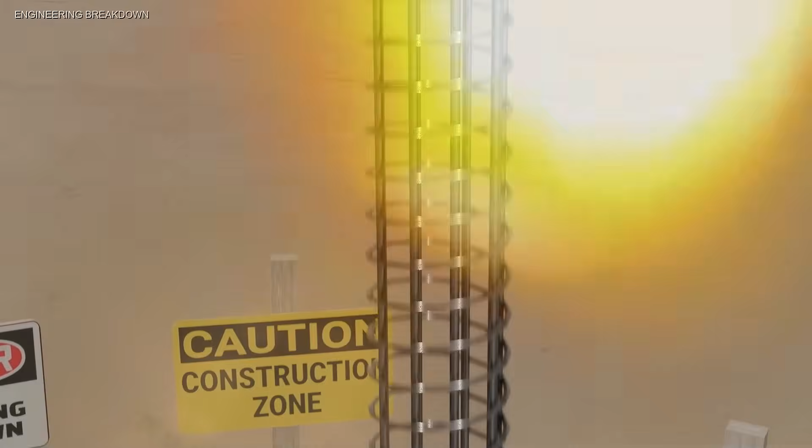Concrete is everywhere, under your feet, inside your walls, holding up bridges, carrying highways, supporting skyscrapers that weigh hundreds of thousands of tons, and almost all of it depends on one gray powder: cement. Take the cement out, and ordinary concrete stops being concrete in the way the modern construction industry understands it. The rocks do not lock together. The sand does not become a solid mass. The structure does not gain the strength engineers expect.

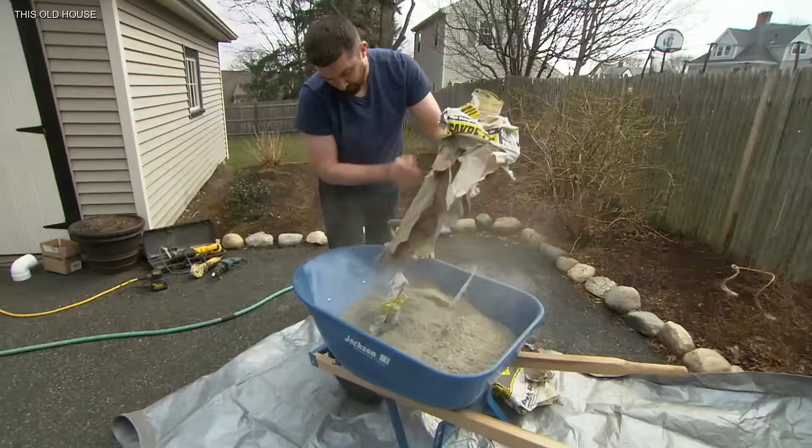So for nearly 200 years, the basic formula has barely changed: stone, sand, water, Portland cement. Then an American company did something that sounds wrong the first time you hear it. It made concrete without Portland cement. Not a laboratory puck. Not a decorative brick. Pourable, pumpable ready-mix concrete. The kind that can arrive in a normal mixer truck. The kind workers can place using equipment they already know.

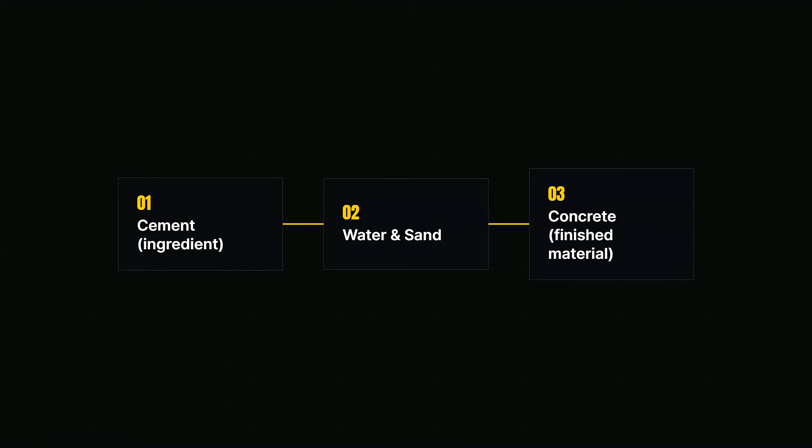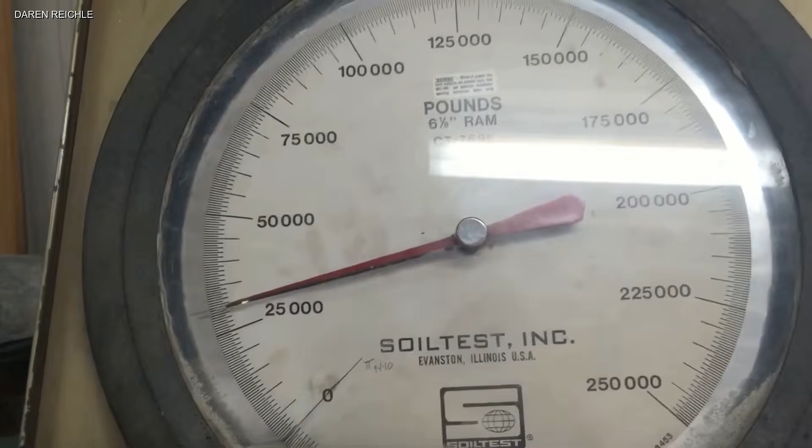The kind that has now been poured into building foundations, shear walls, slabs, columns, sidewalks, airport projects, a section of Interstate 94 in Minnesota, and even the new J.P. Morgan Chase headquarters in Manhattan. The company is called C-Crete Technologies, and according to its latest technical data, its cement-free mixes can reach more than 7,000 pounds per square inch of compressive strength at 28 days. Change the mix design and C-Crete says they can exceed 10,000 psi.

That is not the strange part. The strange part is what is missing: no Portland cement. And if this technology can scale from thousands of tons of real-world pours into millions of tons, then one of the oldest industrial recipes on Earth suddenly has competition.

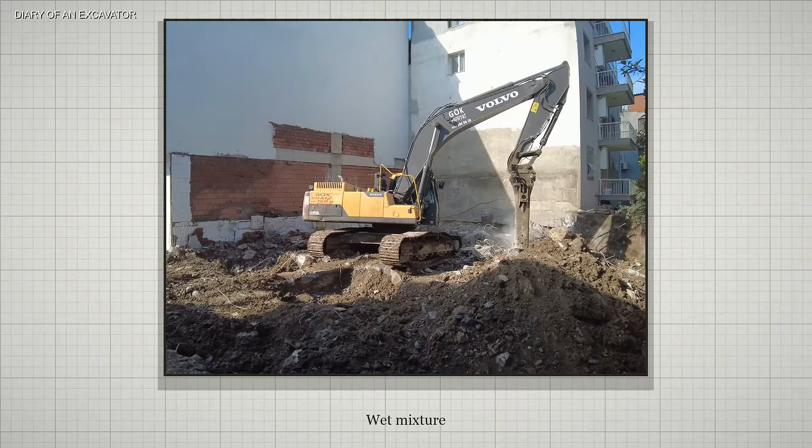A normal concrete mix contains coarse aggregate, usually stone or gravel, fine aggregate, usually sand, water, and a binder. In conventional concrete, that binder is Portland cement. Add water and the cement begins a series of chemical reactions called hydration. New mineral structures form. They grow around the sand and stone. They interlock. The wet mixture slowly hardens into the artificial rock we call concrete. That chemistry is why concrete can start as something soft enough to pump through a hose and end as something strong enough to support a bridge.

Portland cement is astonishingly good at that job. Cheap, predictable, available almost everywhere, supported by more than a century of standards, engineering knowledge, equipment, and supply chains. And the scale is difficult to picture. A modern cement plant does not look like a chemistry experiment. It looks like a small industrial city. Quarries feed crushers. Conveyors move mountains of mineral. Raw material is ground into powder.

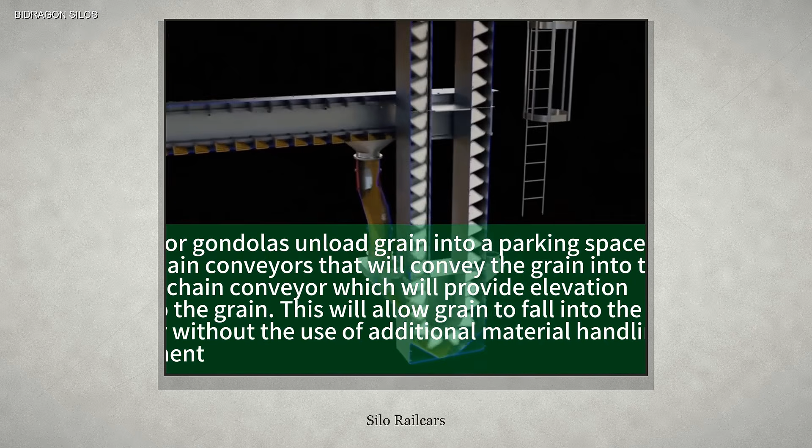Kilns stretch for hundreds of feet. Clinker comes out as glowing nodules. Giant mills grind it again. Silos hold the finished cement. Railcars and tanker trucks carry it toward ready-mix plants. Then the cement disappears into concrete that may be poured only hours later. That entire chain is optimized around one recipe.

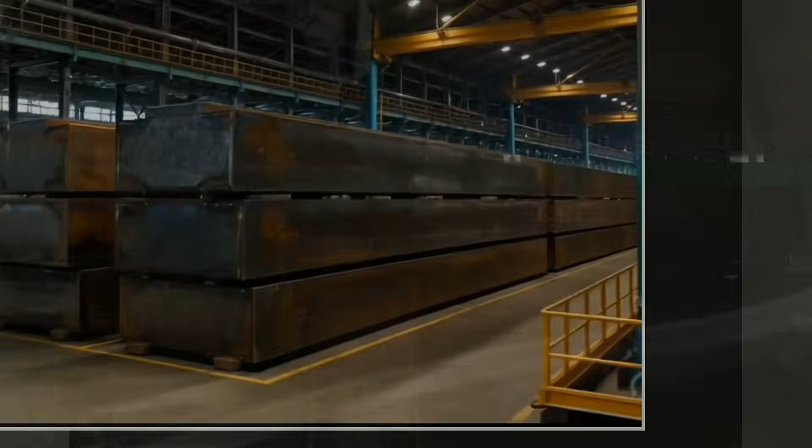If you invent a replacement that needs completely different trucks, different storage, different mixing, different curing, and different crews, you are not replacing one ingredient. You are asking an industry worth hundreds of billions of dollars to rebuild itself around you. That is why the word drop-in is so important in this story. The closer C-Crete can make the new binder behave like the old one inside existing infrastructure, the less of the industry it has to defeat at once.

Do not replace the concrete truck. Do not replace the pump. Do not replace the finisher. Replace the chemistry hiding inside the gray powder. That is also why replacing it is so difficult. You are not competing with a bad product. You are competing with one of the most successful materials ever invented.

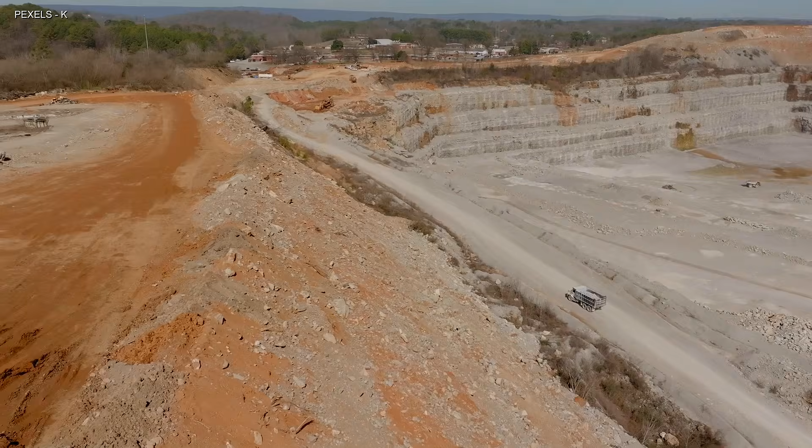But Portland cement has a problem hidden inside the way it is made. The conventional process begins largely with limestone. Limestone contains calcium carbonate.

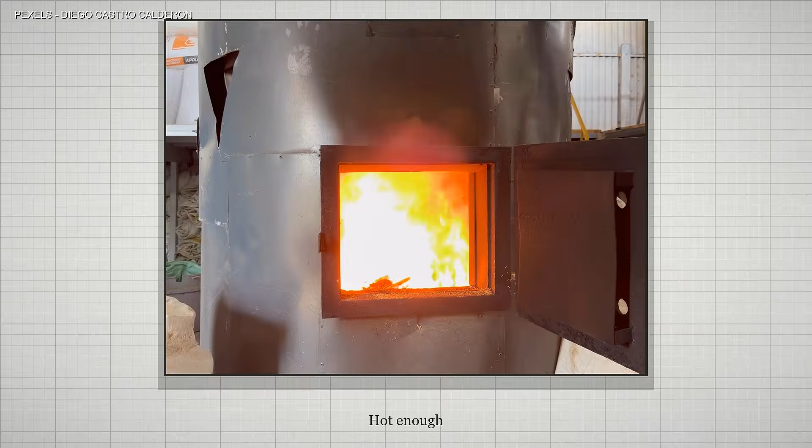To turn it into the reactive material needed for cement, producers crush the rock, blend it with other minerals, and heat the mixture inside enormous rotating kilns. The temperature can reach around 1450 degrees Celsius, hot enough that the inside of the kiln becomes a glowing industrial furnace. That heat requires huge amounts of energy.

But even if you powered the entire kiln with clean electricity, another problem would remain. The limestone itself releases carbon dioxide when it is chemically transformed. Calcium carbonate becomes calcium oxide. CO2 leaves the rock. That is process chemistry, not simply dirty fuel. And that is why cement is so hard to decarbonize.

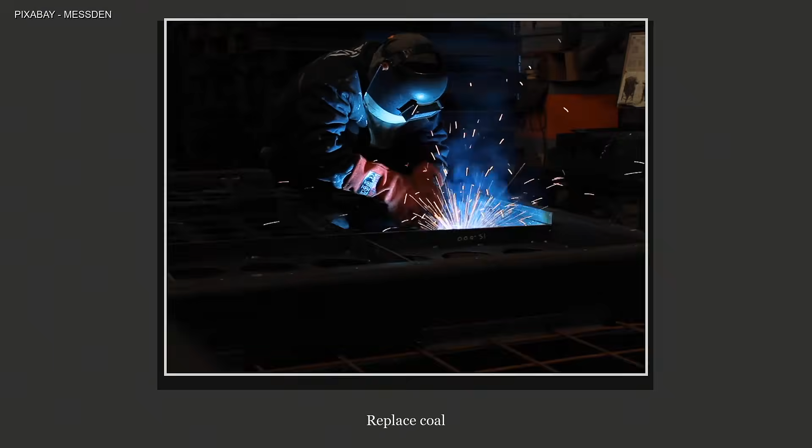You can replace coal, you can improve efficiency, you can capture some emissions, but the conventional recipe starts with a mineral that physically contains carbon dioxide and then deliberately bakes that carbon dioxide out. Cement production is responsible for roughly 7 to 8% of global carbon dioxide emissions by commonly cited industry estimates. That is an extraordinary number for a material most people never think about.

And the reason is simple. We use an unbelievable amount of it. Concrete is often described as the most consumed material on Earth after water. Roads, homes, ports, dams, hospitals, factories, data centers, wind turbine foundations, runways. Almost every part of the built world eventually asks for concrete.

So the challenge is not to invent a green material that works in one beautiful demonstration building. The challenge is to create something the construction industry can actually use, at enormous scale, at ordinary job sites, under ordinary deadlines, with ordinary workers. And this is where C-Crete's approach becomes interesting.

The company's product is described as cement-free concrete, but that phrase needs one important clarification. C-Crete has not discovered a way to make stone and sand stick together with nothing. There is still a binder. What disappears is Portland cement. The company has developed alternative cementitious binders made from abundant natural rocks and industrial byproducts.

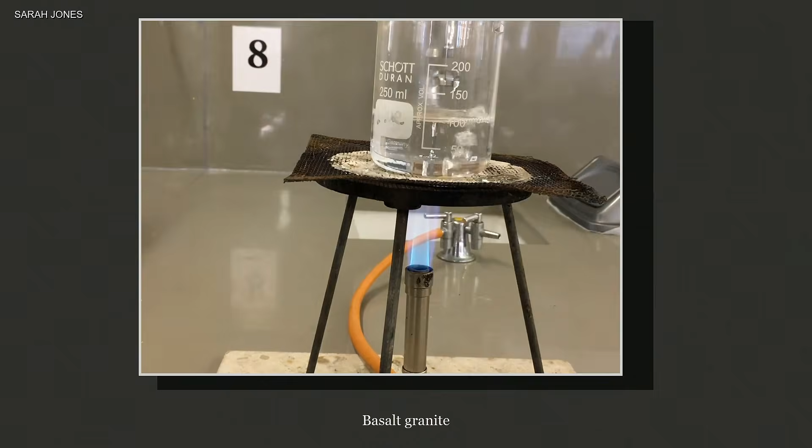The exact formulation is proprietary. But C-Crete has publicly demonstrated versions based on materials including zeolite, basalt, and granite. That distinction matters. This is not concrete without chemistry. It is concrete with different chemistry. And the strategy is surprisingly simple.

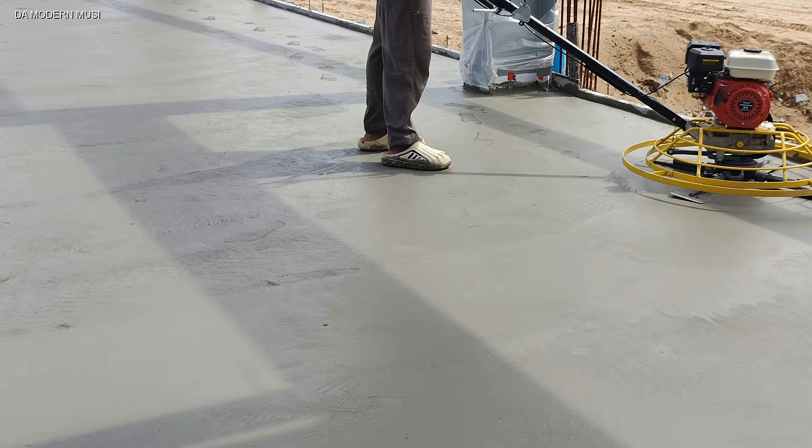Do not ask every construction company in America to replace its trucks. Do not invent a new pump. Do not require workers to learn an entirely new pouring technique. Change the powder inside the mix. Keep as much of the rest of the construction system as possible. That is what people mean when they call a technology drop-in. The new material has a much better chance if it can disappear into the old infrastructure. And C-Crete has spent the last few years trying to prove exactly that.

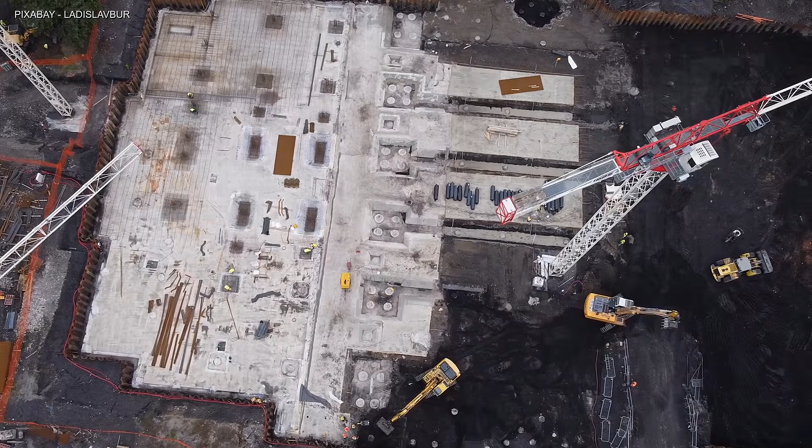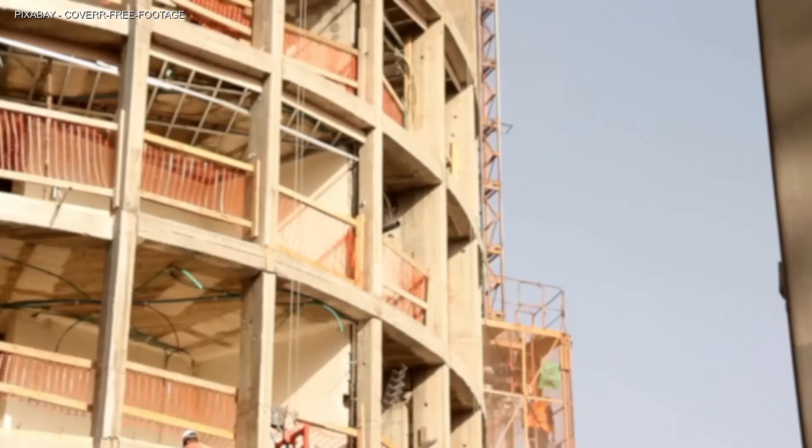The first major public demonstration came in Seattle in 2023. A commercial building in the Green Lake neighborhood needed a seismic retrofit. A normal project. A real building. Real structural work. C-Crete supplied cement-free concrete that was delivered through a local ready-mix company. Workers poured it into foundations and shear walls. About 60 tons in the first publicly announced pour.

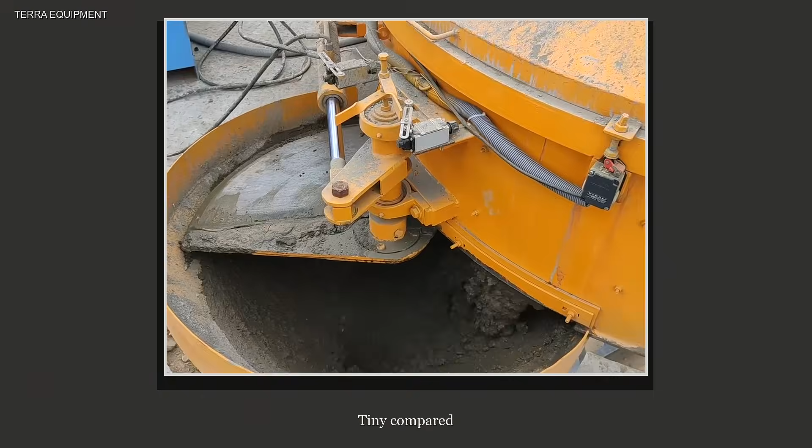Then the experiment expanded. More C-Crete mixes were used at the same site. Different feedstocks. Different formulations. By the time the company demonstrated a basalt-based version in 2024, the total cement-free concrete placed at the Seattle project had reached roughly 140 tons. That is still tiny compared with the millions of tons of conventional concrete poured every year.

But the important part was not the tonnage. The important part was that the concrete behaved like something contractors recognized. It arrived. It flowed. It was placed. It hardened. The building did not become a laboratory.

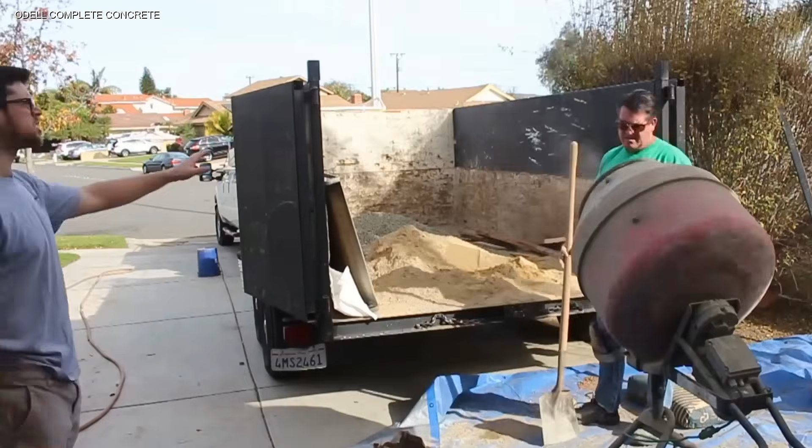Then the story moved from a small Seattle project to one of the most visible construction sites in America. 270 Park Avenue, Manhattan. The new global headquarters of J.P. Morgan Chase. A super-tall skyscraper rising more than 1,300 feet above New York. In July 2024, C-Crete's granite-based cement-free concrete was poured there. 12 cubic yards. A topping slab in the upper lobby.

Now, be careful with that number. C-Crete did not build the entire J.P. Morgan Tower out of cement-free concrete. Not remotely. 12 cubic yards inside a skyscraper of that size is a small demonstration. And that is exactly why it matters.

Construction is conservative for a reason. If a phone app crashes, you reopen it. If structural concrete fails inside a skyscraper, people can die. Engineers do not replace a century-old material because a startup has a good presentation.

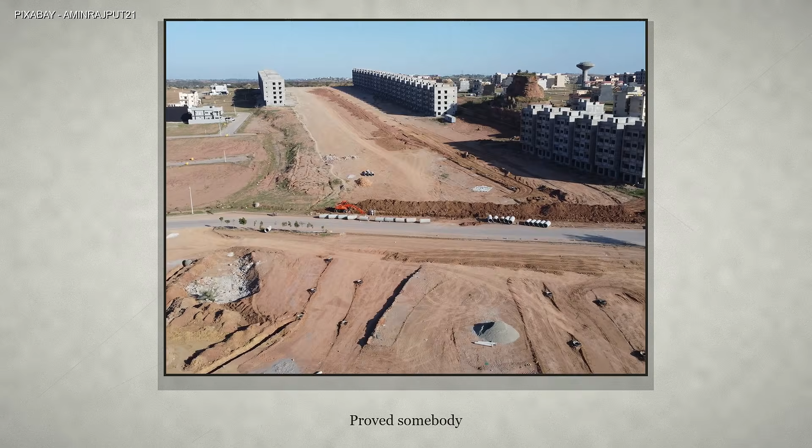New materials enter slowly. A slab, a wall, a foundation, a section of pavement, something that can be inspected, tested, measured. Then repeated. C-Crete getting into a real super tall project did not prove Portland cement was obsolete. It proved somebody responsible for an extremely serious building was willing to place the material in the building. And then came a different test.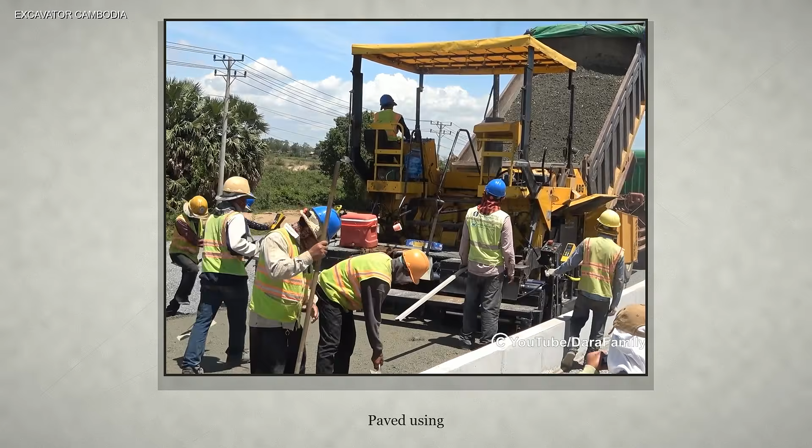Traffic. In September 2024, a section of westbound Interstate 94 in Minnesota was paved using C-Crete's cement-free material. The section opened to traffic. Cars passed over it. Heavy vehicles passed over it. Now the concrete had to deal with a completely different world. Loads, weather, water, salt, freeze-thaw cycles, vibration. The kind of repetitive abuse highways experience every day.

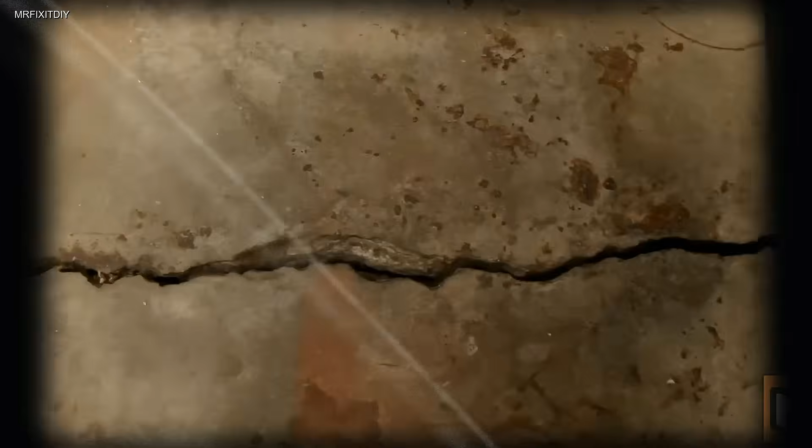That matters because strength is only one part of concrete performance. A material can be extremely strong in a laboratory and still be terrible concrete. It can shrink too much. Crack. React with aggregates. Allow chlorides to penetrate and corrode steel reinforcement. Lose durability after repeated freezing and thawing.

Set too quickly. Set too slowly. Generate too much heat inside massive pours. Concrete has to survive a long list of boring problems. And boring problems are what destroy real infrastructure.

C-Crete's 2026 technical data is interesting because it does not only list compressive strength. The company reports performance under established ASTM and AASHTO tests for setting time, shrinkage, alkali-silica reaction, freeze-thaw resistance, chloride diffusivity, and other properties. Its standard 28-day compressive strength is listed above 7,000 psi. The company says modified mix designs can exceed 10,000.

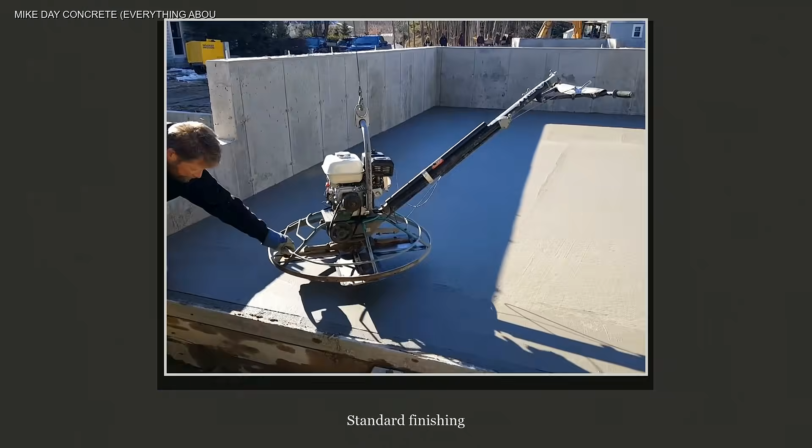Its freeze-thaw durability factor is listed above 90% under the relevant test. And C-Crete says the material can use conventional admixtures and standard finishing methods. Those are company-reported product figures, though C-Crete says the technical data has been verified by independent third parties. That qualification is important. This material has not been sitting under American bridges for 50 years.

C-Crete's oldest commercial pour is only a little more than 3 years old. The company says it shows no visible degradation or cracking. Good. But 3 years is not 50. That is one of the central problems every new construction material faces.

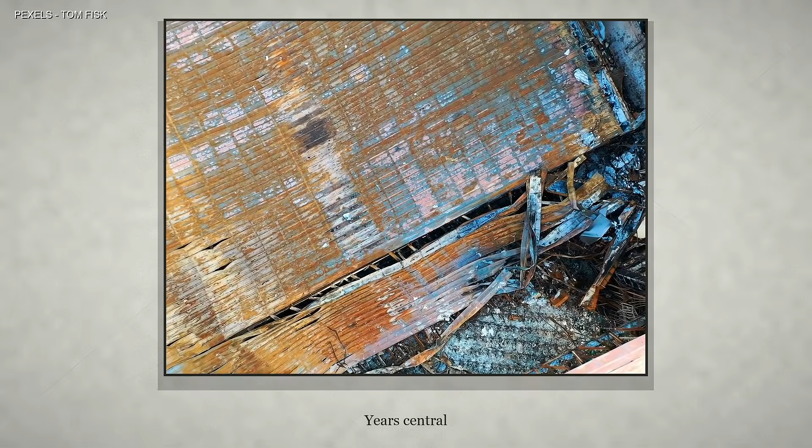You can accelerate laboratory tests. You can expose samples to freeze-thaw cycling. You can measure chloride penetration. You can test shrinkage. But there is no machine that can instantly give you 4 decades of real weather, workmanship, maintenance, and abuse. Time has to happen.

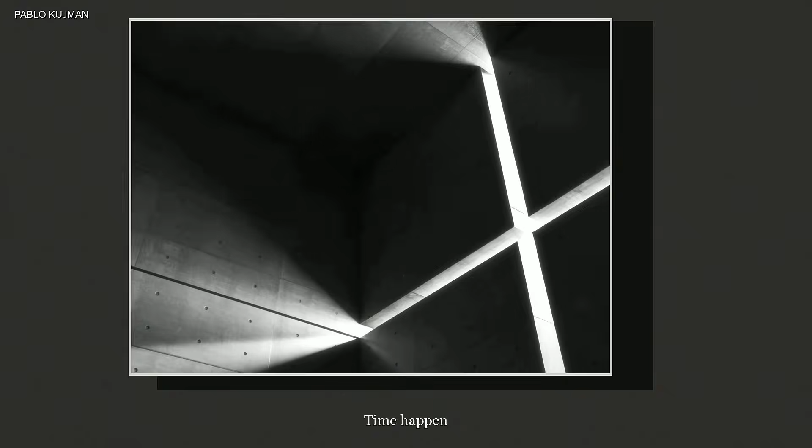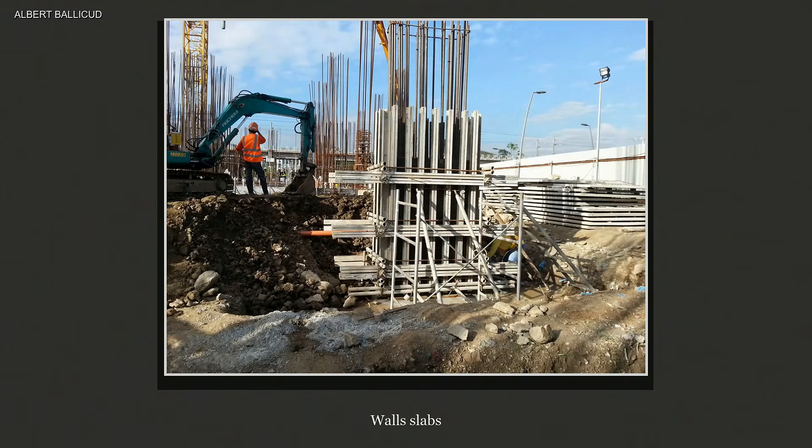By 2026, C-Crete says more than 3,000 tons of its cement-free product has been poured across residential, commercial, and federal projects. The list includes foundations, walls, slabs, columns, driveways, sidewalks, highway sections, and projects in several American cities. That is no longer one bucket in a laboratory, but it is also nowhere near the scale of the conventional cement industry.

To understand the gap, imagine that every successful C-Crete project completed so far were stacked into one enormous pile. Then place that pile beside America's annual cement consumption. The commercial demonstrations would almost disappear. That sounds like a criticism. It is actually the stage every industrial technology has to pass through.

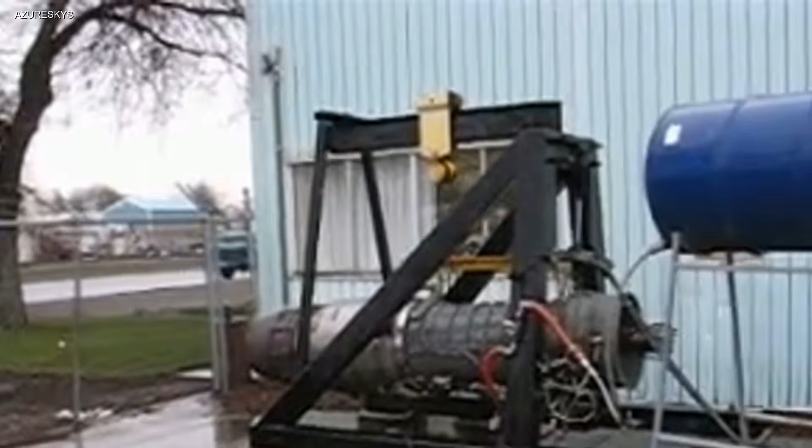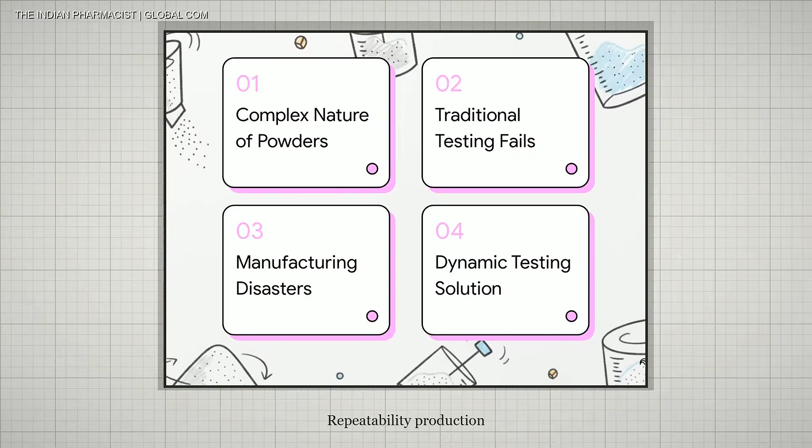A jet engine does not go from one test stand to powering every airplane. A battery chemistry does not go from one coin cell to every car factory. A new building material does not go from one Seattle wall to every bridge in the country. First comes chemistry, then repeatability, then production, then codes, then procurement, then factories. Then decades of boring, reliable use.

C-Crete has crossed some of those gates. It has not crossed all of them, but it is far enough along that the next questions are no longer theoretical. They are industrial. And that gap is the entire battle.

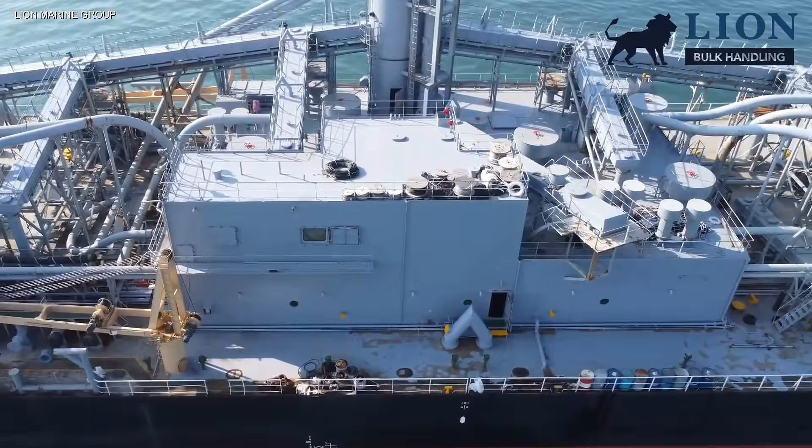The United States consumes tens of millions of tons of cement in a normal year. Globally, production is measured in billions of tons. 3,000 tons can prove that a process works. It cannot prove that the process can supply a continent.

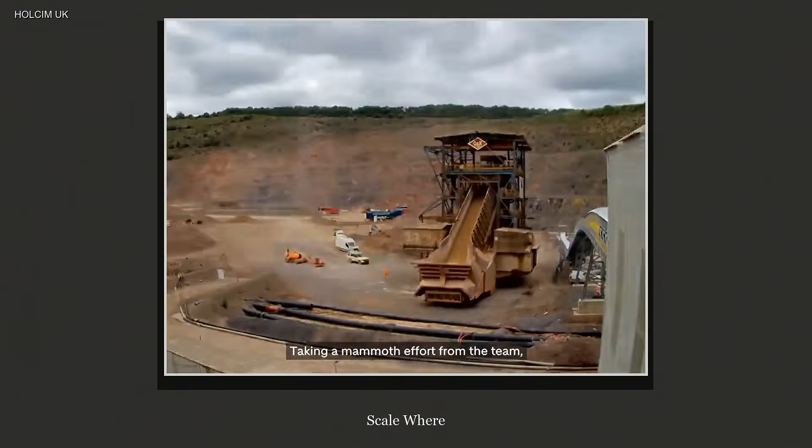Scale changes everything. Where do the raw materials come from? Are they consistent from one region to another? How much processing do they require? What happens when demand jumps 1,000 times? Can the binder be produced near ready-mix plants? How much does it cost after transport?

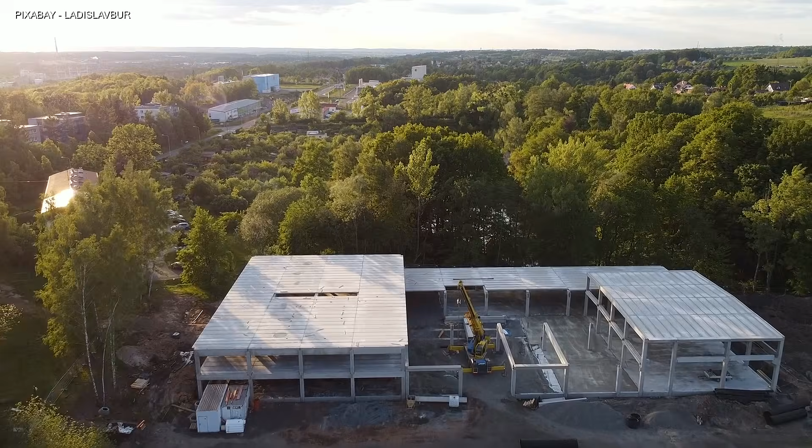Can contractors order it with the same confidence they order Portland cement? Can specifications be written around it? Will insurers accept it? Will public agencies approve it? Will engineers sign their names to it? That is why C-Crete's most important claim may not be its carbon number. It may be cost parity.

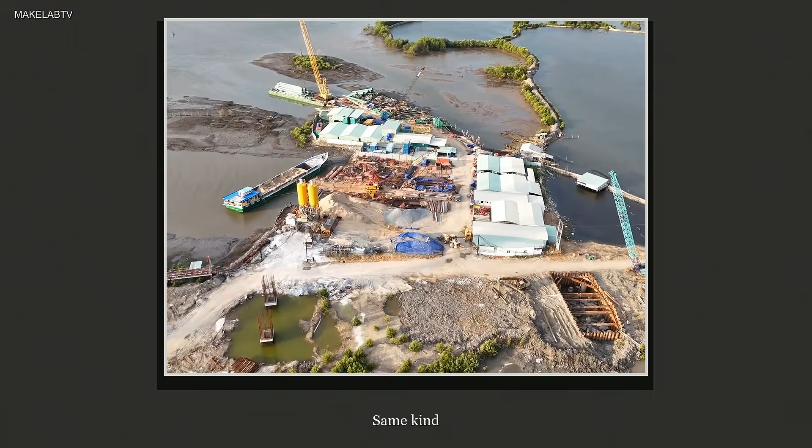The company says its cement-free concrete can be cost-competitive with conventional concrete. If that holds at scale, the conversation changes completely. Because construction does not buy morality by the truckload. It buys performance, schedule, risk, price. A low-carbon concrete that costs 3 times more may win flagship projects. A low-carbon concrete that costs the same and arrives from the same kind of truck can attack the mainstream.

And there is another clever part of C-Crete's strategy. It is not betting everything on one exotic mineral. The company has demonstrated multiple binder feedstocks: zeolite, basalt, granite, industrial byproducts. That matters because cement is a local business. Concrete is heavy. Transport is expensive. You do not want to ship every ingredient halfway across the country if a suitable material exists nearby.

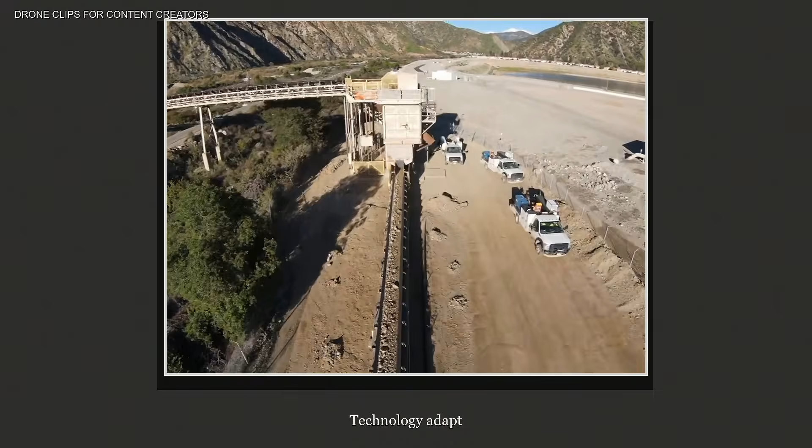A technology that can adapt to abundant regional feedstocks has a better chance of scaling than one dependent on a rare waste stream. And America is now full of companies attacking this same problem from completely different directions. Sublime Systems, born out of MIT, is developing an electrochemical process that avoids the traditional high-temperature limestone kiln. Its first commercial facility in Holyoke, Massachusetts, is being developed for tens of thousands of tons per year.

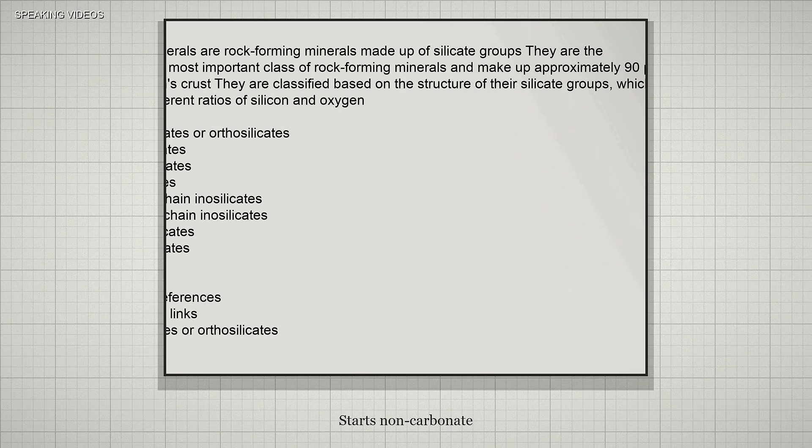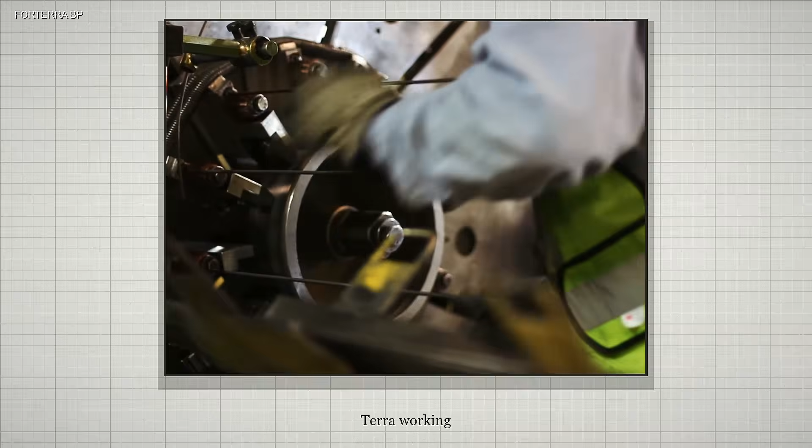Brimstone is taking another route. It starts with non-carbonate rock and aims to produce ordinary Portland cement itself, along with other industrial products, without relying on limestone as the source of calcium. Forterra is working around existing cement infrastructure and mineralizing captured carbon dioxide into cementitious material. Terra is commercializing materials that can replace a large portion of Portland cement today and is developing a product intended to replace all of it.

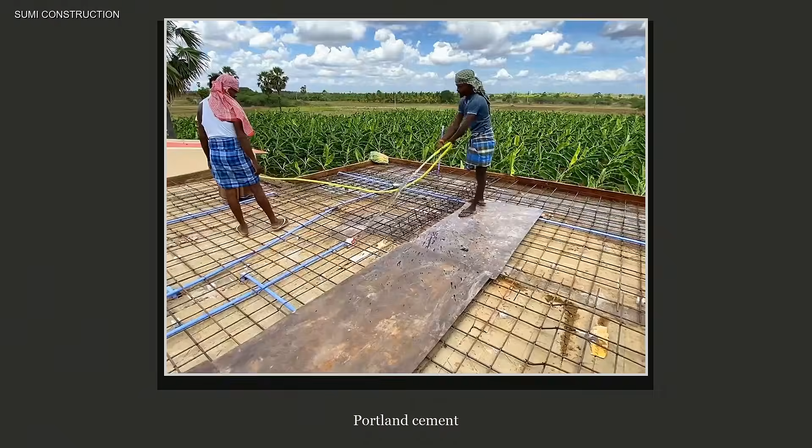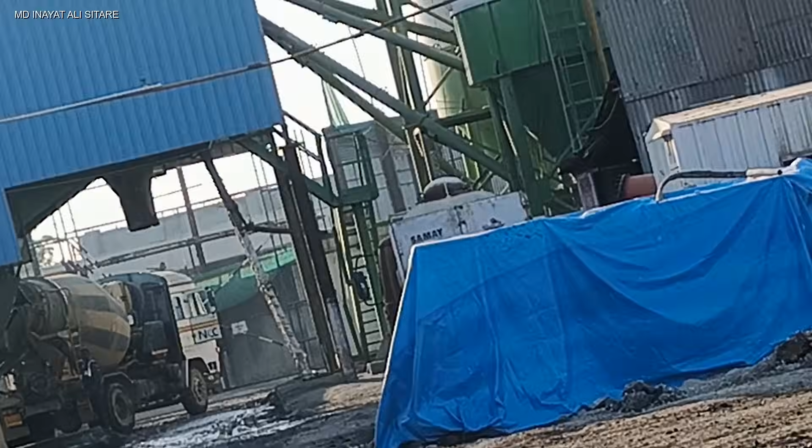Different chemistry, different factories, different business models, same target: the clinker. That small gray nodular material made inside cement kilns is becoming one of the most contested substances in American industrial technology. Because if somebody can make concrete with dramatically less clinker or no Portland cement at all, while keeping the price, strength, and construction process familiar, then they are not selling a green niche product. They are attacking one of the largest material markets on Earth, and C-Crete's version may have one unusual advantage. It is already being poured.

That phrase matters. Already being poured. There is a huge difference between a material that can theoretically replace cement and one that has gone through a batch plant, into a mixer truck, down a pump line, and into a real structure. Construction is full of technologies that look incredible until they meet a job site. The truck is late. The weather changes. The crew adds water. The pump pressure changes. The finishers want a different slump. The concrete starts setting. A laboratory does not care that the contractor has 20 workers waiting. A construction site does. So a drop-in material has to survive not just chemistry. It has to survive human beings.

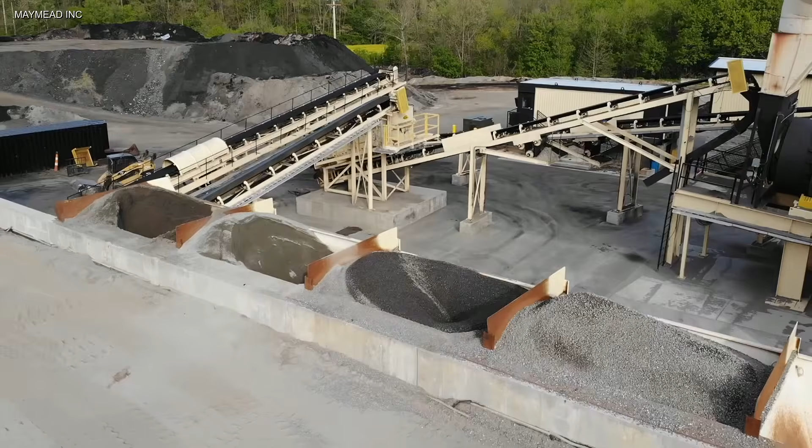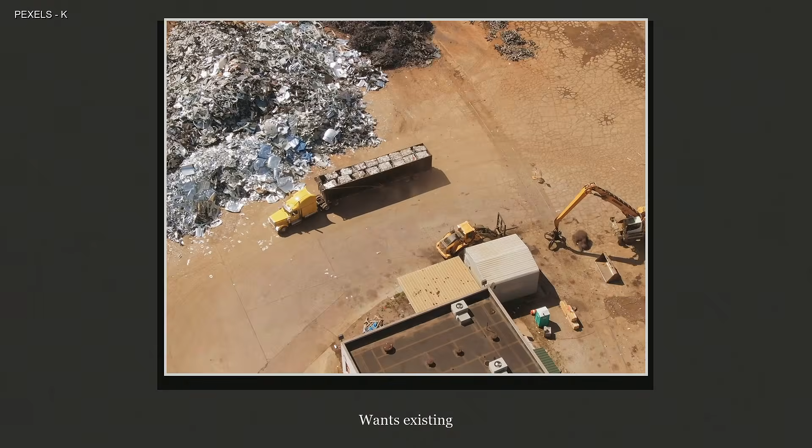And this is where C-Crete's use of existing ready-mix companies becomes strategically important. The company has worked with established suppliers, including major concrete names on project delivery. It is not trying to build a parallel concrete industry from scratch. It wants the existing industry to carry the product. That is much harder technologically, and much easier commercially if it works.

There is also a fascinating twist in the emissions story. Conventional Portland cement releases carbon during production. C-Crete says its binders avoid those process emissions and that the resulting concrete can absorb carbon dioxide over time as it cures and ages. The company estimates that replacing a ton of Portland cement with a ton of its binder can avoid up to roughly 1 ton of CO2. It also says some mixes require around 15% less water. Those are potentially enormous advantages.

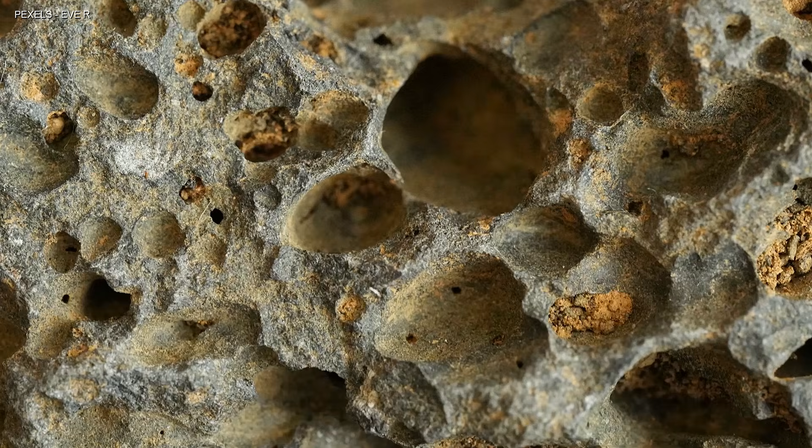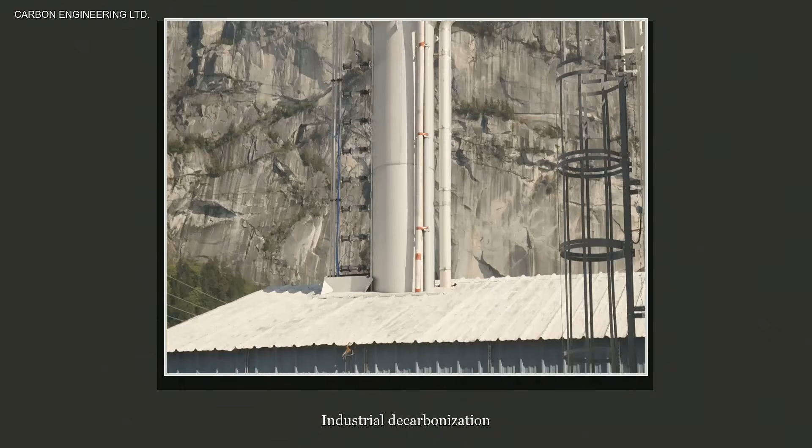But again, do not turn that into the wrong headline. C-Crete has not invented a concrete road that will vacuum the atmosphere clean. Concrete absorbs limited amounts of carbon through mineral reactions. The climate value comes mainly from avoiding the emissions associated with conventional Portland cement production in the first place. That is a much less magical claim, and a much more important one. Because industrial decarbonization does not always need one giant machine sucking carbon out of the sky.

Sometimes you stop creating the carbon before it exists. Remove the limestone chemistry. Remove some of the kiln burden. Use a different binder, then pour the same wall. That is the promise. But whether C-Crete becomes the company that wins this race is completely unknown.

Portland cement has 200 years of momentum. It has giant multinational producers, dedicated quarries, kilns, standards, contracts, distribution networks, engineering software, building codes, supplier relationships, an entire civilization already organized around buying it.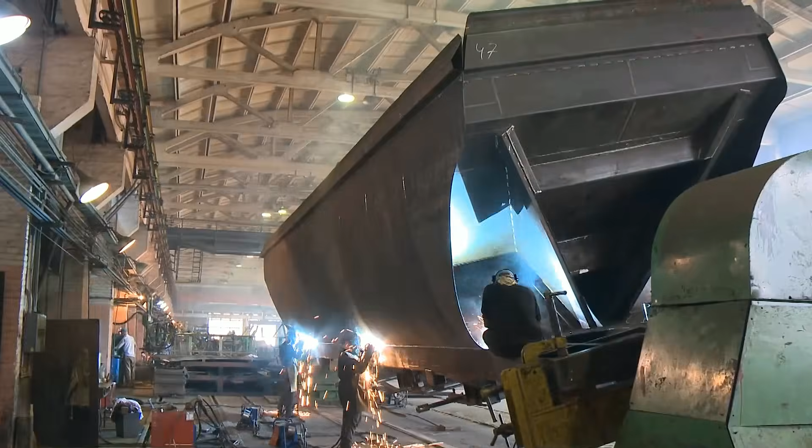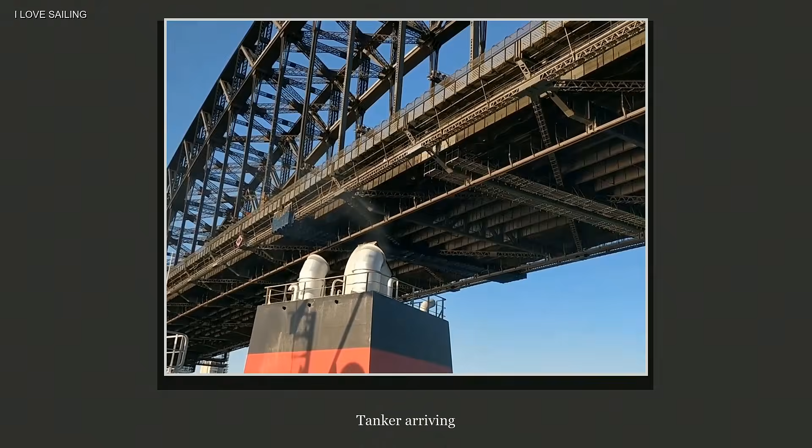To replace even a meaningful fraction of that system, C-Crete would need manufacturing capacity far beyond anything it has demonstrated publicly so far. Quality control would have to remain consistent as feedstocks change. Costs would have to remain competitive. Performance would have to survive decades. And contractors would have to trust that the bag, silo, or tanker arriving next year behaves like the one they tested this year. Those are not side issues. Those are the industry. That is also why the current stage is so interesting.

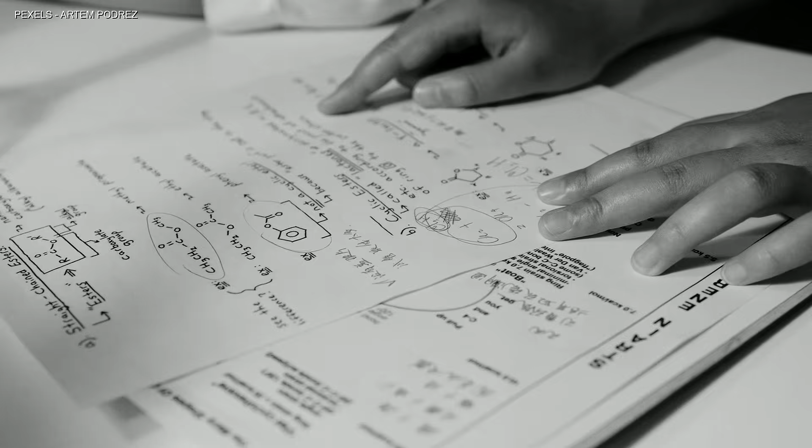We are watching the transition from materials science to industrial proof. For years, low-carbon concrete stories lived in research papers. A new binder. A new additive. A new way to mineralize CO2. A sample crushed in a laboratory press. Now American companies are moving into highways, skyscrapers, commercial plants, ready-mix networks. Actual procurement. The argument is shifting.

The question is no longer only, can you make concrete without conventional cement? C-Crete has already shown that you can make useful concrete without Portland cement. The next question is brutal. Can you make enough? And if the answer eventually becomes yes, the consequence is much bigger than greener buildings. It changes where the cement industry gets its raw materials. It changes what happens to limestone kilns. It changes which companies control the binder.

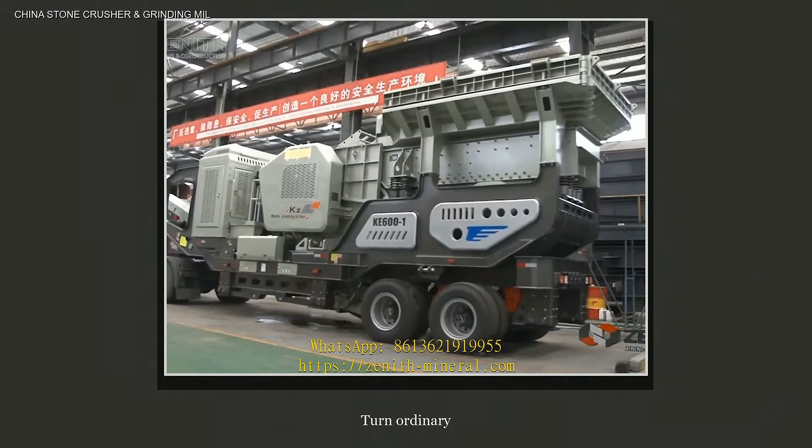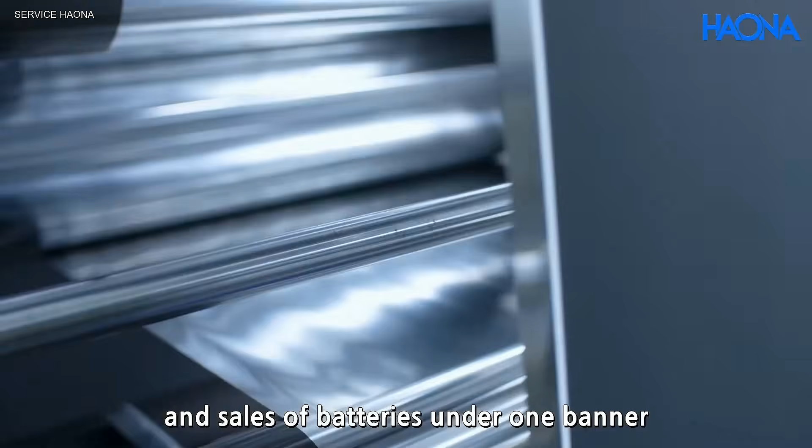It could create new manufacturing plants in regions that never had major cement production. It could turn ordinary rocks and industrial byproducts into strategic construction feedstocks. And it could give builders more than one answer to a material recipe that has barely had serious competition for generations. Think about what happened with batteries.

For years, lithium-ion looked like the only serious modern chemistry. Then sodium-ion moved from laboratory curiosity into factories and commercial products. It did not make lithium disappear. It created another option. Cement may be entering the same kind of period. Portland cement is not going away next year. It may not go away in our lifetimes. It is too cheap, too proven, too deeply embedded.

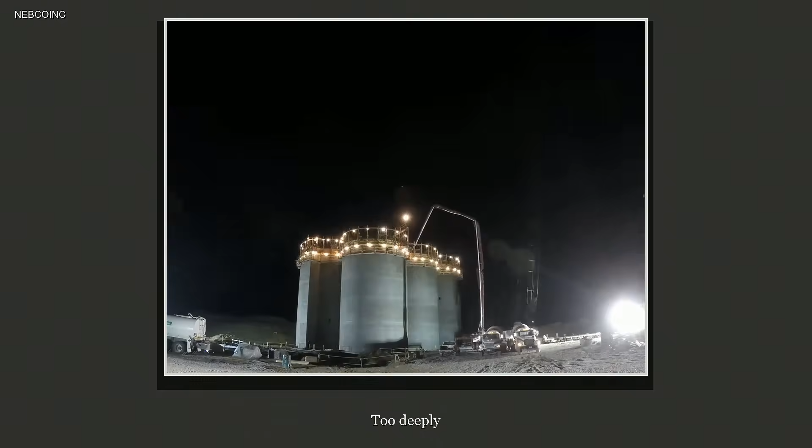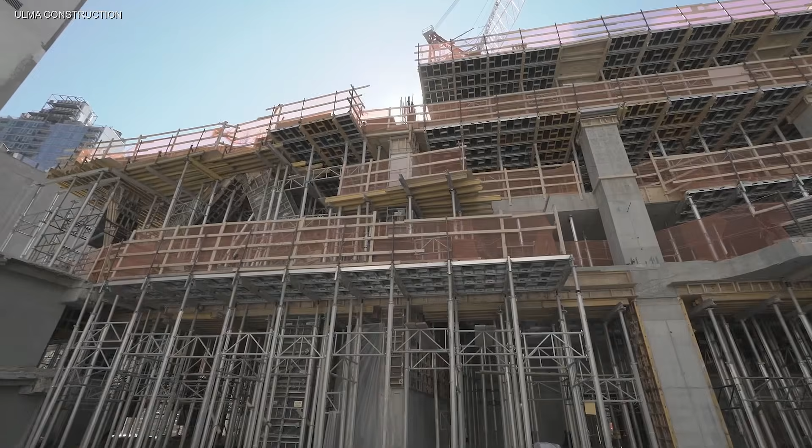But monopoly at the level of chemistry is different from dominance. The moment credible alternatives exist, the industry has to compete with a future it never had to think about before. And that is why one small slab inside a Manhattan skyscraper matters more than its size suggests. Not because 12 cubic yards changed global construction. It did not. Because 12 cubic yards crossed a boundary. The material left the lab. It entered one of the most demanding construction ecosystems on Earth.

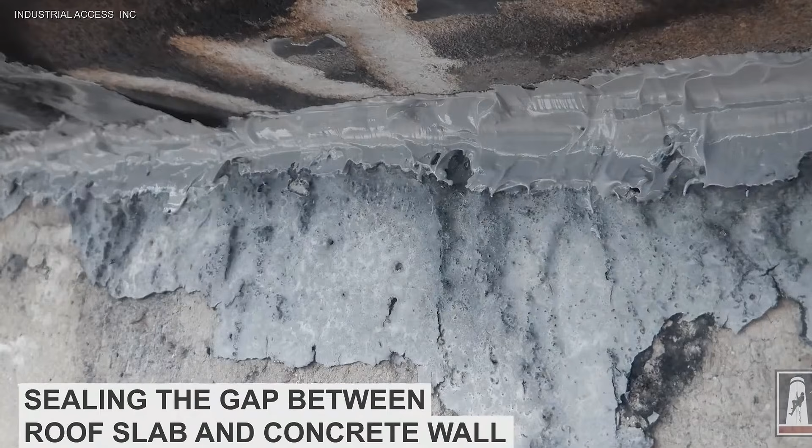Then more material went into roads. More went into foundations. More went into ordinary projects. 3,000 tons becomes the next proof point. Then 30,000. Then 300,000. Then, maybe, millions. Or maybe the technology stalls. Maybe costs rise at scale. Maybe another American cement technology wins instead. Maybe Portland cement producers adopt pieces of these ideas and remain dominant. That uncertainty is real. But the old assumption is already weaker.

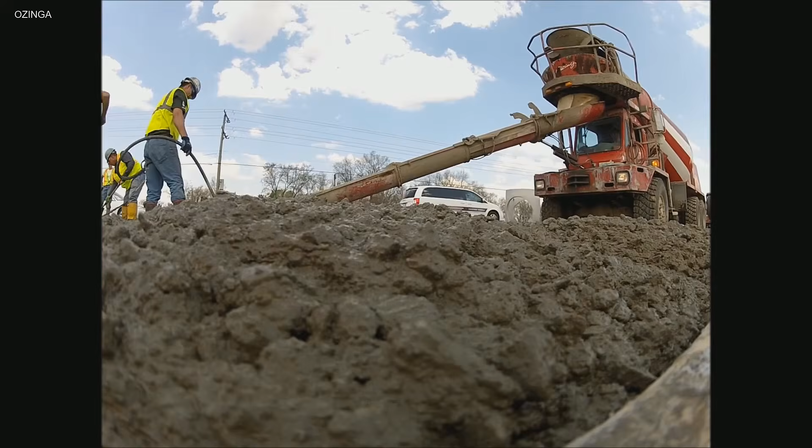For generations, concrete and Portland cement were so tightly linked that most people use the two words as if they meant the same thing. They do not. And America is now proving that distinction in the most physical way possible. Pour the concrete. Let it harden. Drive trucks over it. Build on top of it. Then ask what is missing. No Portland cement. That is the breakthrough.

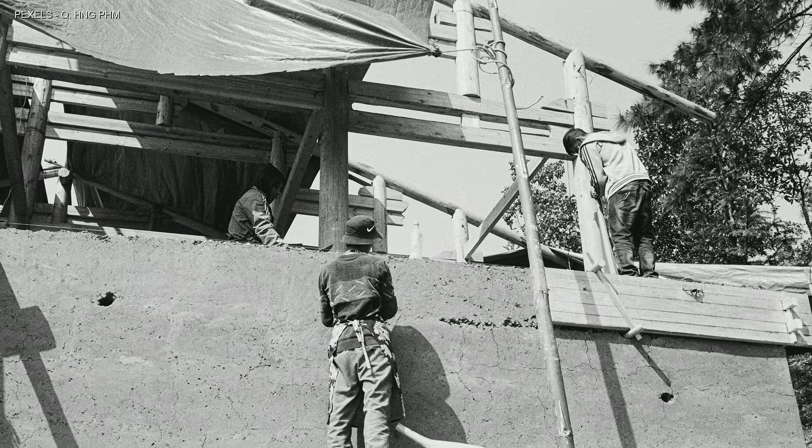Not that America invented concrete. Not that cement is dead. Not that every building tomorrow will be made from C-Crete. Something more believable happened. A 200-year-old industrial recipe finally got a serious alternative that can be delivered in a concrete truck. And if that alternative survives the only tests that really matter, time, cost, and scale, then one day the strangest thing about cement-free concrete may be that we ever thought concrete needed Portland cement in the first place.

Because sometimes the biggest breakthrough is not adding something new, it is discovering which ingredient you can remove.